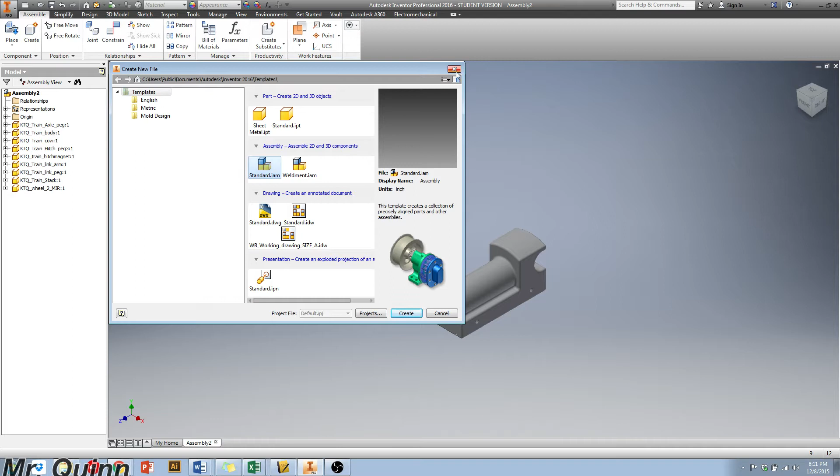Alright, so we've made all of our parts for the train. We are ready to start assembling right now. I started an assembly file. I just went up to File, New, and I created a standard assembly. I have all my parts right here. I'm ready to rock and roll.

There's only one thing I need to start worrying about now, making sure I have the right number of everything. If I need to copy anything, it's really easy. I'm just going to click on my shape, do Control C for copy, bring my mouse a little bit farther away, Control V, and it'll pop up right where my mouse is at. I know I'm going to need 2 link arms.

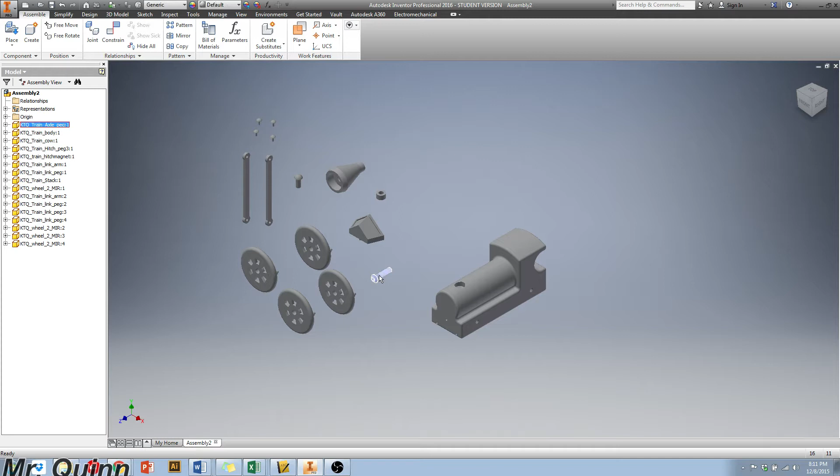I have link pegs, Control C. I know I need to have 4 of those total. I need to have 4 wheels. And I need to have 4 axles. Okay, now I'm ready to rock and roll.

Alright, I'm going to lock my train body in because everything is going to be attached to that, so I want to make sure my train body will not move. So I'm going to just right click on it and say grounded.

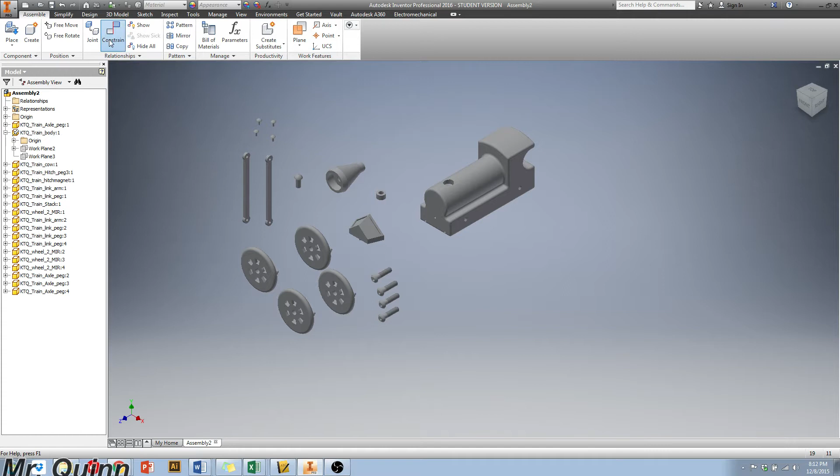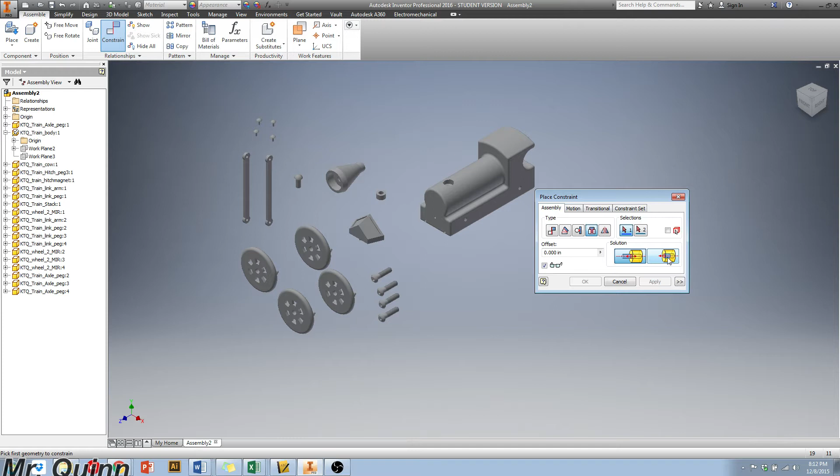Now previously we talked about 2 constraints here, mainly mate and flush. Now with all of these, it's actually kind of a peg going into a hole, and so we actually have a special constraint here called insert. There are 2 types of inserts: opposed, which is what we mainly use, where you just have a screw going into something, and aligned, which is more like a flush type of insert. So if you had a peg sitting flush inside of a hole, that's what you would use for that. I'm just going to show us really quickly how to use it, and then we're going to move forward and go on to the exploded view.

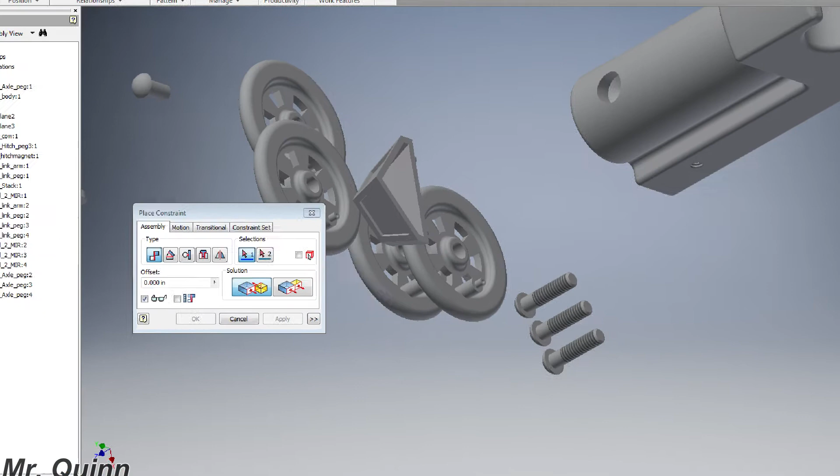So when I'm doing this, it's really easy. I'm going to just rotate around a little bit so I can see this, and I'm going to do constrain. When I go up to insert here, there's my insert. And what I want to do is go all the way up to this part of the screw, and I want that part to be touching this, and it'll automatically pop into place.

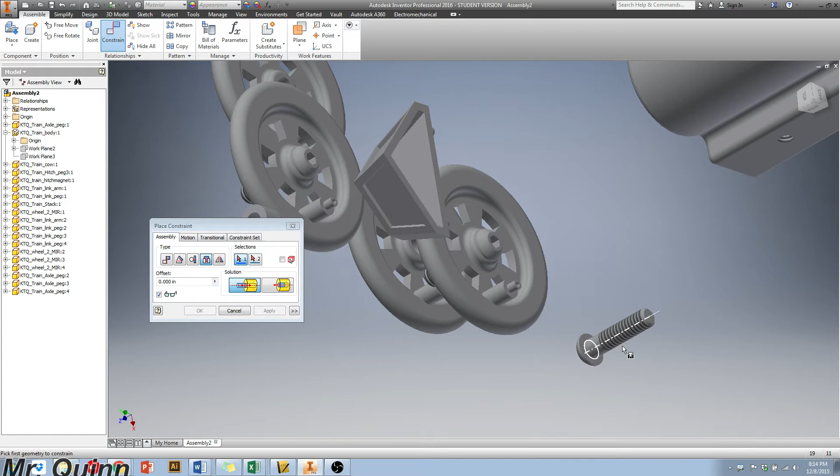After I got that, I just want to say apply. I'm going to do that with all these really quickly. Apply. Apply. Where's my last one? There it is. You thought you could get away. You go right in there and apply.

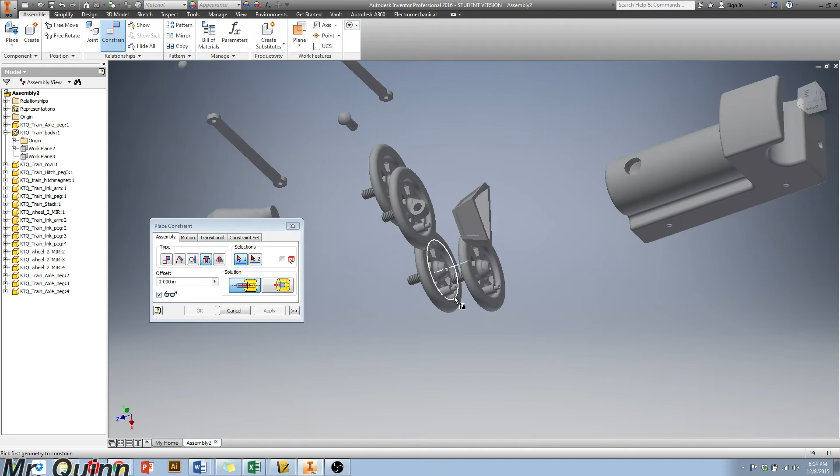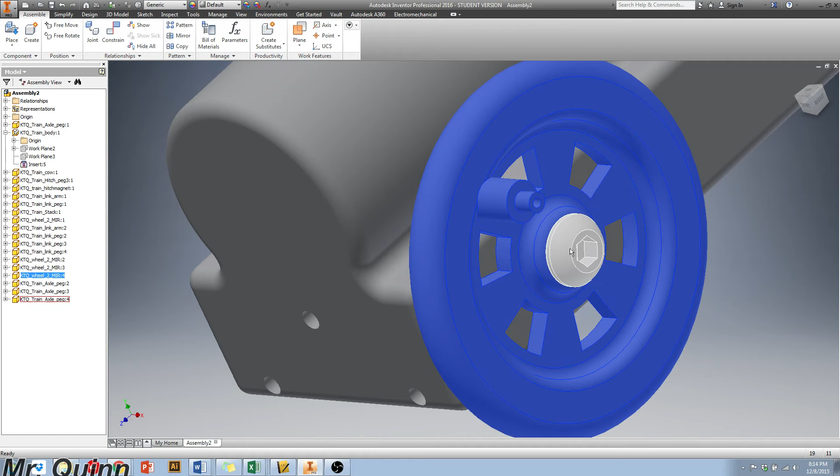So now I've got those ones together. I'm going to go ahead and say I want to go all the way up to here, up to that wheel, and insert right into there. And there we go, you can see the wheel will fit flush up against there, going right into the hole. I do want you to notice that if I do this, it rotates around. I don't really care if it rotates around, it's actually supposed to rotate around in the actual part.

So I'm going to go ahead and do the rest of these here really quickly.

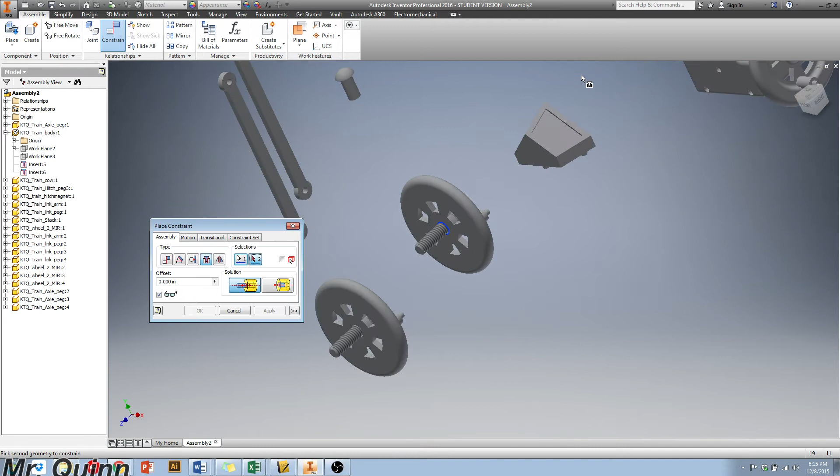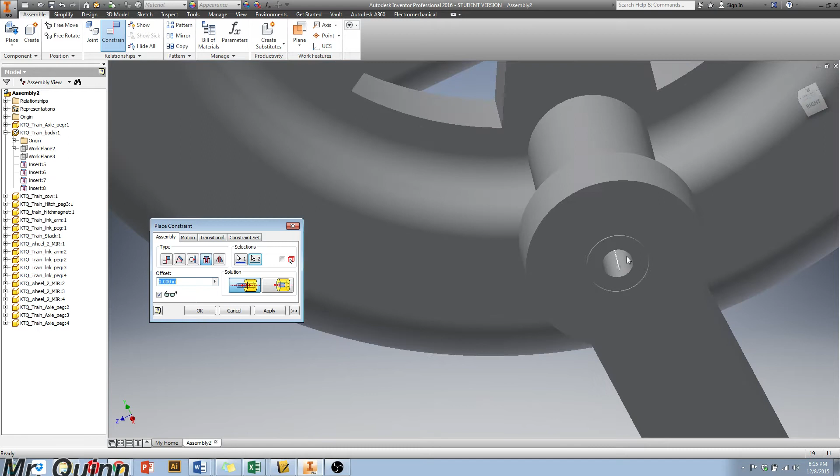And I'm going to do these arms as well. So it should go all the way up to there actually, so the front should be sitting flush like that.

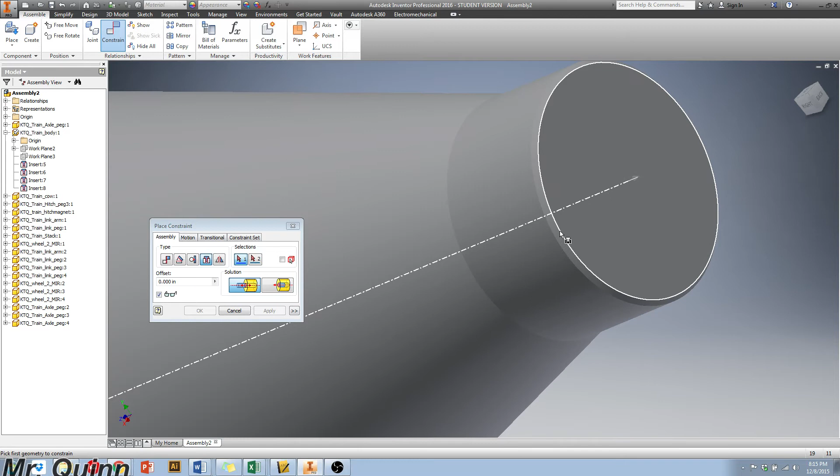Alright, so that's how you use the insert. The hardest part to insert is going to be the stack. You want to be sure to select the farthest out circle, and that's going right into there, so it should be touching that bottom edge right there, and then you can say apply.

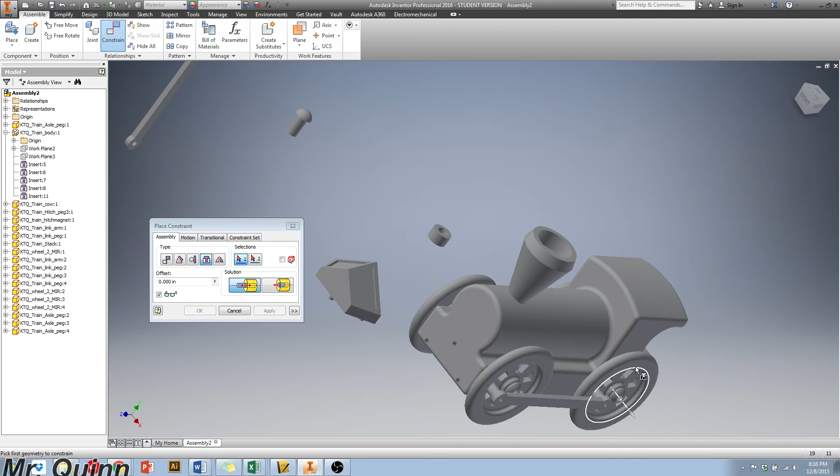Alright, so you should be able to assemble this rather quickly. You could see how quickly I've just assembled this part. I would only have 7 more parts to go really to assemble. So it goes by really quickly.

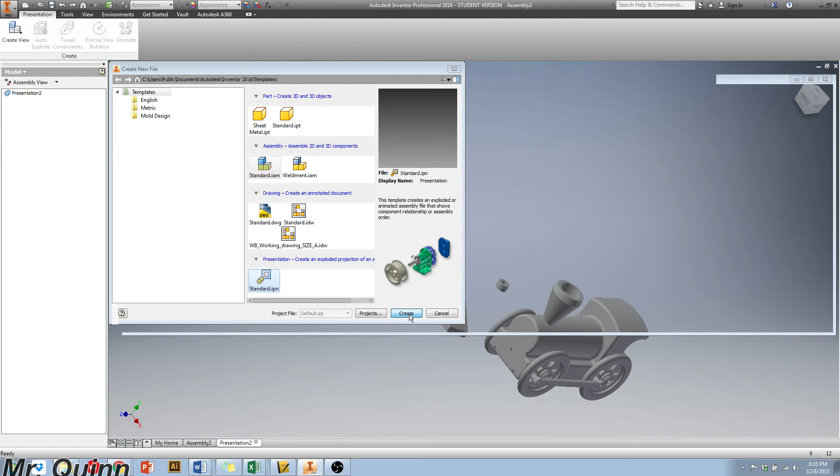So I'm going to go into how we do our exploded view. To make the exploded view for this, I'm going to go to the I and say new. I want to go to presentation and say create. Inside of here, we're going to put our assembly in here. And there we go. There's our assembly completed of our train.

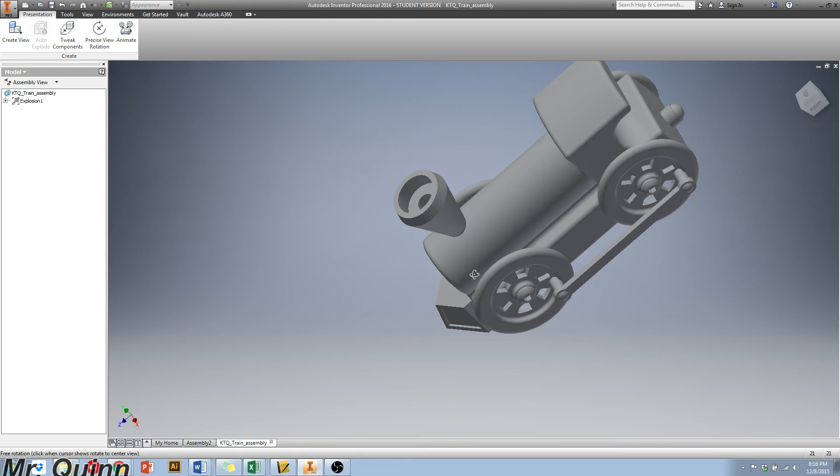I want you to notice that on the front, it's totally flush up there. Sometimes people have it sticking out, but it shouldn't be sticking out. Everything should be fitting nice and tight.

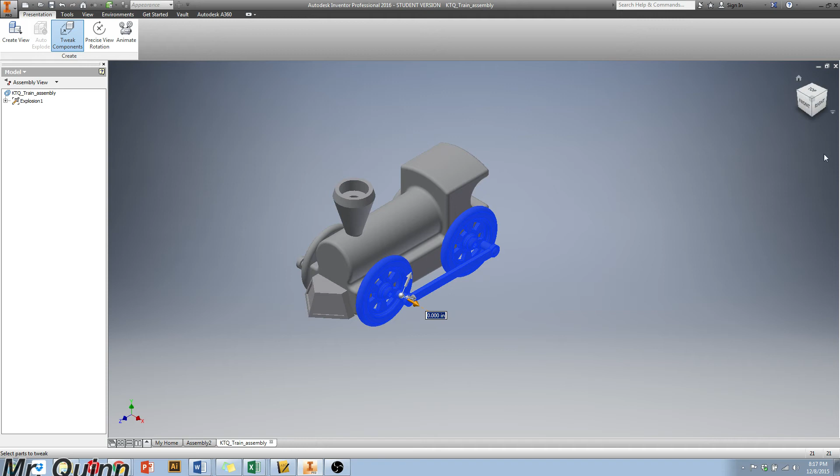Alright, so what I want to do here is I want to tweak my components. We've done this before, right, with the cube project. So I'm going to go ahead and select all my shapes. Now, I'm selecting all the shapes that I'm going to be going out on one side because they're all actually going to be brought out here.

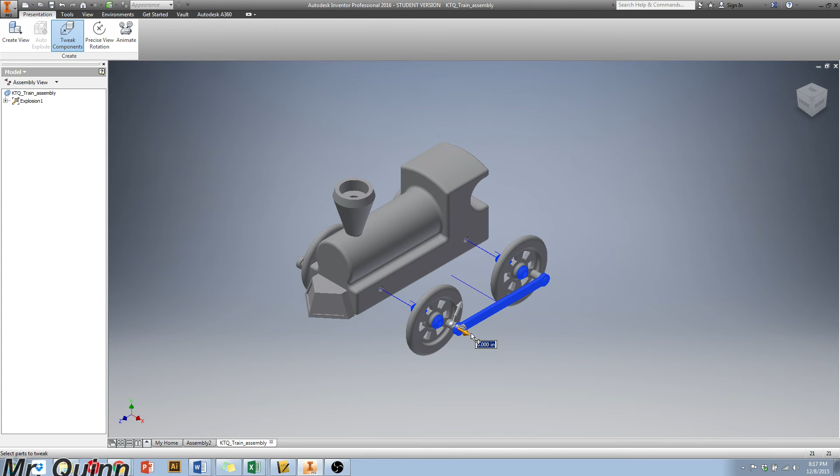After I bring it out a little bit, instead of clicking the check, I can click on this plus, which just says apply. So I can say apply. Once I do that, I can hold down control and I can deselect these wheels and I can keep on moving forward. That drops off the wheels, so that way I can get an easier exploded view.

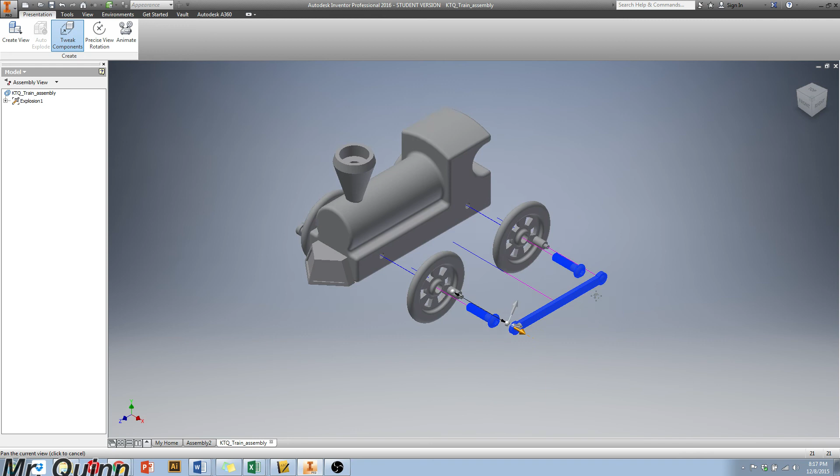Everything is even when it's coming out. It's all coming out at the same time. Both the wheels are the same distance apart, so it looks really nice when you start using this kind of way to make an exploded view.

I'm going to drop off that, and I'm going to keep moving forward here. I can say check. That's what I want to finally get to.

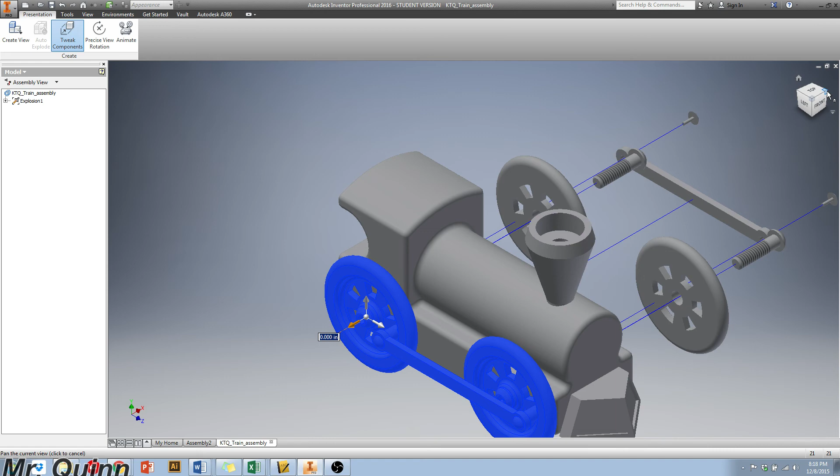On the other side, I'll do it really quickly here. Tweak component. Make sure I have everything. When I finally get it, I'm going to go on the isometric side because this is what I'm going to view when I make my working drawing.

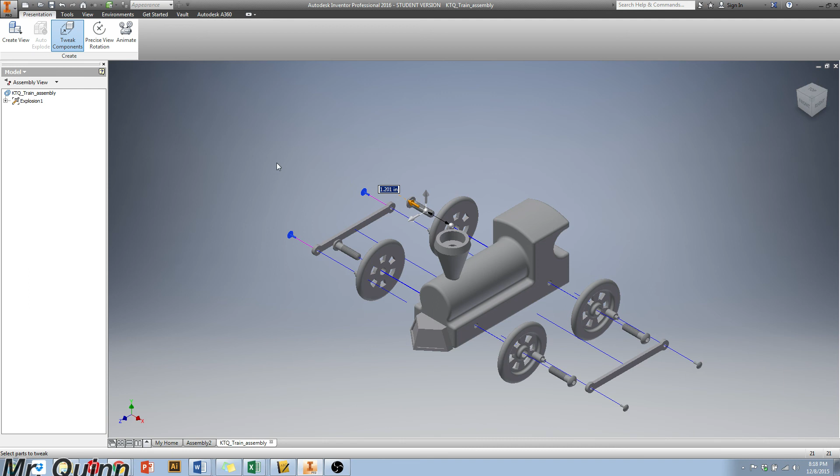I want to say apply, drop off the wheels, bring it farther out, apply, and then check. Alright, one difficult part about this one is the cow catcher.

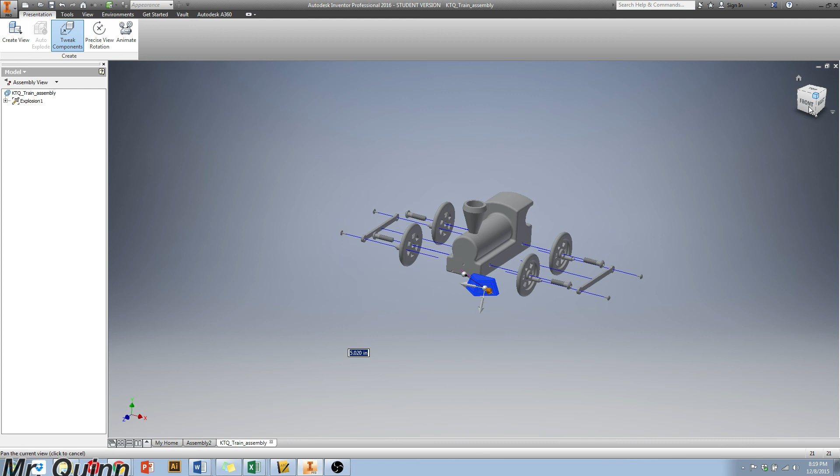The cow catcher, what people tend to want to do is they want to click on this angle part and then they start bringing it out. And if I look at it from the front, you can see it's going upwards and out at an angle. So it's not really what you want to do. For that one, make sure you are selecting on the flat surface there, and you can just bring it straight out this way.

Alright, so just did a quick little review on how to use the tweaks and how to make this exploded view. Alright, I hope everything is going alright with you when you're doing this.